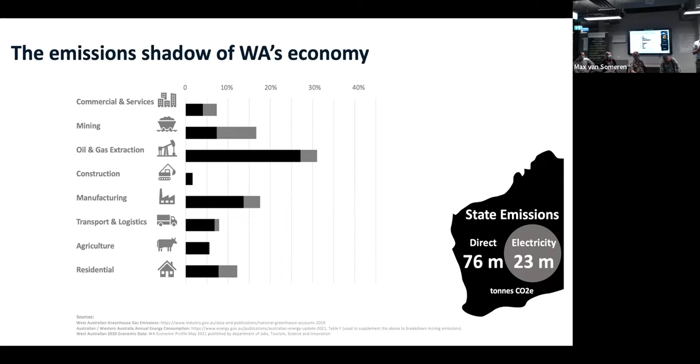So it's a great intro to the previous talk, but an absolutely terrible intro to this talk. I knew that at the time, because I knew we had this coming up. So I downplayed residential then, but I think I can backtrack from that without actually changing the facts. First thing to point out is that WA is actually a bit of an odd case.

The other thing is to think about the kind of decisions we make in relation to housing and buildings. They're very different to other decisions in our lives, because they're large, high cost decisions we make relatively rarely. One example from my own life, which you may have seen because I posted it on LinkedIn last week, was that I installed a home battery.

This cost me $17,000. Adrian was joking earlier that maybe that's why the money box is over there, so I can slowly get that back.

The amount of CO2 it will save is about 2 tons per year, and I'll probably never see the total return on the investment. It works out as about $200 or $250 per ton of CO2 saved. So it's a pretty expensive way to save CO2, actually.

But the reason it was appealing as a decision was because it's the kind of decision I only have to make once. Right now we live in a society where pretty much everything we do creates emissions, and it's completely exhausting to try and think about that all the time - like when you go to the supermarket, thinking about the decisions you make, the other procurement choices of all the little things we buy in our lives.

The bar all the way to the left is heating and cooling. This one says 40%, I've heard it as high as 48%. So if we design our houses so that they are warm in the winter and cool in the summer with minimal additional energy, we can immediately eliminate most of that energy expense. Now if you add energy efficient appliances, LED lighting, you can drop that down a lot further. And if you're using electricity instead of gas for cooking, it gets even better. According to Max, who put up that very cruel graph, it's only about 12% of our energy use, but we can, with better design, pretty much knock that in half right away.

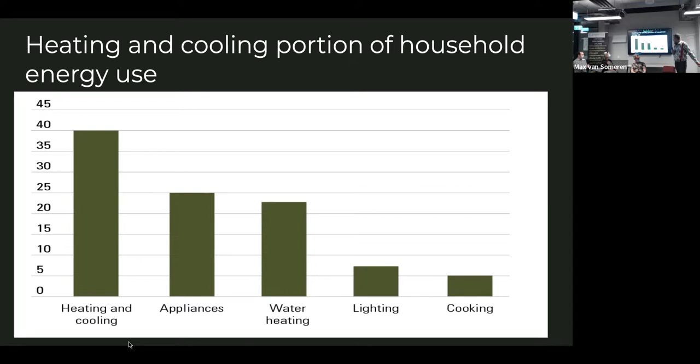You put solar panels on the roof, yeah okay, you don't have any energy bills, but you've got to pay it off and it's a long slow route. But the people who are living in passive solar houses, they just tell me their lives are so good. And this is why I want this to become mainstream.

Now probably a lot of you are not going to build a house this year, but you probably know somebody who does plan on building a house or is part of a housing cooperative or something. What I keep saying to people is: friends don't let friends build badly. So we want to get this idea out into the mainstream—this is a much better way of living. And it's not rocket science, although Matt will tell you differently because he's got a living to make.

So I've spent the last 6 years going to people who are living in passive solar houses and interviewing them—what's it like living in a passive solar house? I want to run through this because Matt's going to tell you the mechanics of it, how it works, but I want to tell you about actually living in a passive solar, energy efficiently designed house.

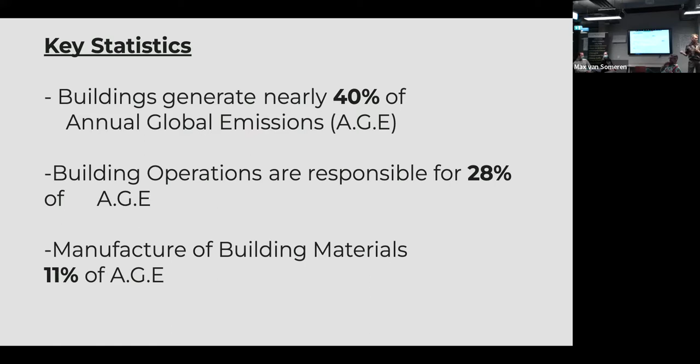So there are two main streams of energy efficient building design. Keith has just outlined the glories of passive solar design. And there's also the passive house, which a lot of you probably have heard of if you've watched Grand Designs. You know, you see the guy with the big fan on the doorway testing to see if the house is airtight. That's passive house, those sort of houses.

So we'll have a look at, I'm just going to run through quickly the 5 main points for each one. And if you can remember those, you're going to walk away from here tonight fairly empowered to know the guts. And yes, it is relatively simple in reality, but you'll know these principles, and it's quite empowering to know that if you ever make a decision in the future to build a new home, you'll be able to go, wow, I know the 5 principles. You can pick one or the other, and away you go.

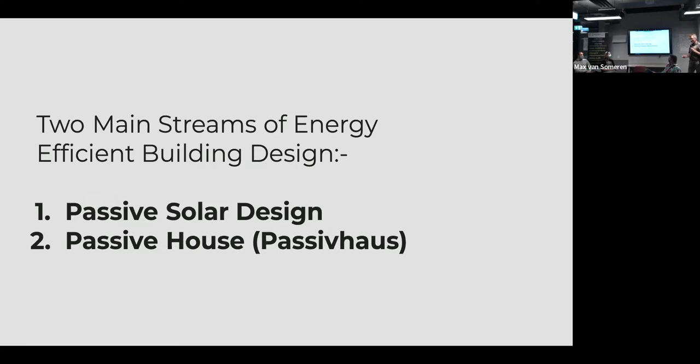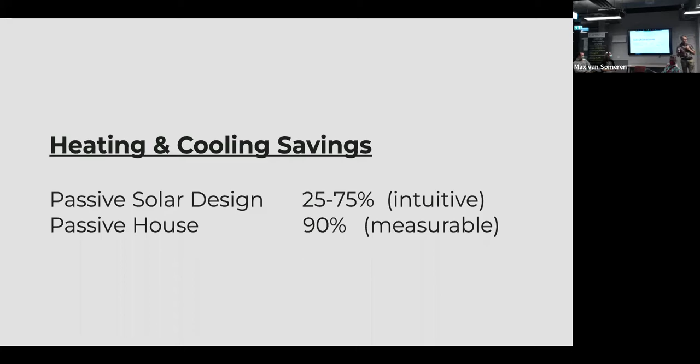So these two streams - passive solar design can save you anywhere from 25 to 75% of your heating and cooling, and passive house is designed to save you 90%. Passive house is measurable. It is a German-based system, engineered. Everything is designed and measured down to the decimal place, which is pretty cool. I don't really love physics, but I did the course and my brain was whirring having to absorb all the physics of it, but it's pretty amazing. Passive solar design is more intuitive, but it has principles that obviously work really well.

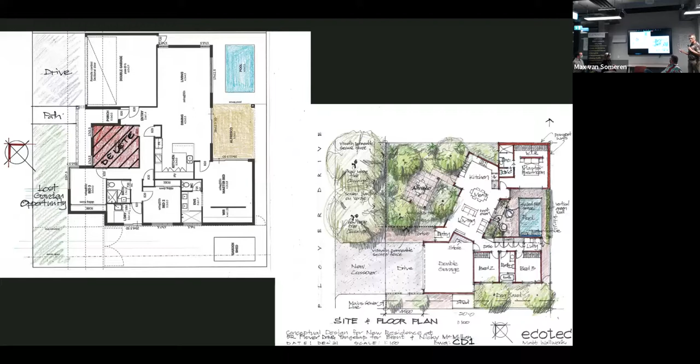And we've got such an amazing climate here that not using our outdoor spaces as rooms of the house is counterintuitive. So they're ecstatic with this. It was just a really good example, and it was a bit tricky because obviously the north is at the wrong angle, it's at the front of the house. But I've suggested having a quite thick hedging at the front to give a private front yard. So there's ways of solving complex problems and making it work.

So getting on to the 5 principles. Orientation was the first. Obviously your outdoor living, if you can get it to the north, is fantastic. Your living areas oriented there, and bedrooms and bathrooms can be to the south. It isn't always possible to do this, but there are things you can do to mitigate it if you can't.

The second important principle is the design of how the sun enters the house. On the left, the sun is high altitude in summer, low in winter. That's a principle most people understand these days, having the eaves designed correctly. Our problem in Perth is more the summer than the winter, keeping the heat out rather than trying to keep buildings warm. But you want to do both, while always leaning towards keeping the heat out of a house in Perth.

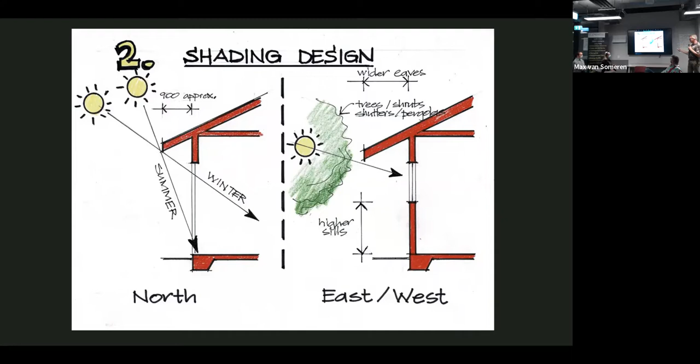And on the right, east-west windows, you've got the sun coming in low. So you've got to deal with that, and there's various techniques you can use to do that. But I really just want to run through quickly so you know what the 5 principles are.

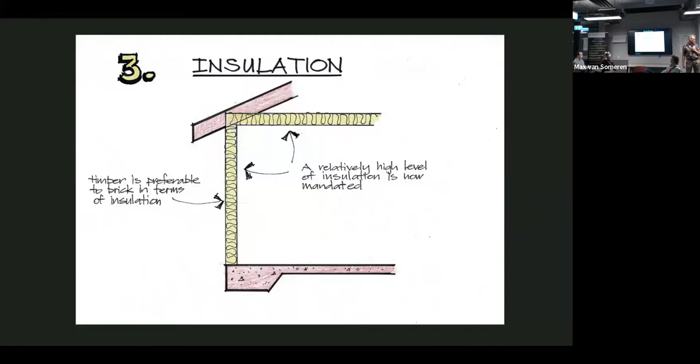So insulation, that's like Keith was saying, wasn't that popular in the 1960s, and now our government even supports insulation. We had that semi-disaster thing of the free insulation a few years ago, but that's obviously important.

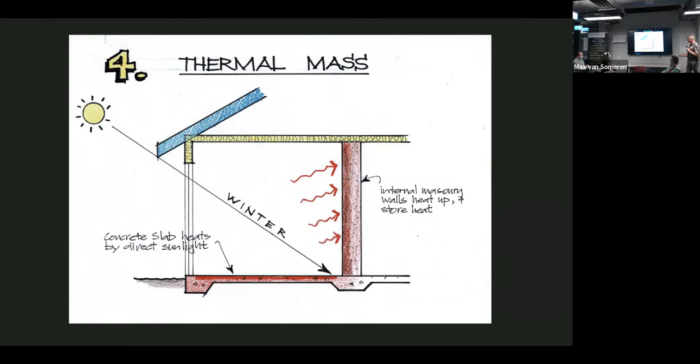Thermal mass is what Keith illustrated with the concrete slab heating up. You can do that with other materials inside the house, concrete walls, rammed earth or heavy brick walls, or reverse brick veneer external walls where the thermal mass is on the inside of the building. And then cross ventilation is another really important principle, where you're using our cooling breezes, obviously in WA, it's the Freo Doctor.

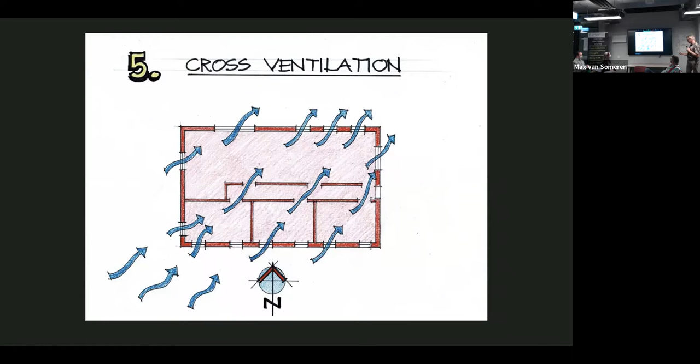And there's ways of positioning windows and doors within rooms and the whole house to make it be able to be flushed out when you take advantage of those breezes.

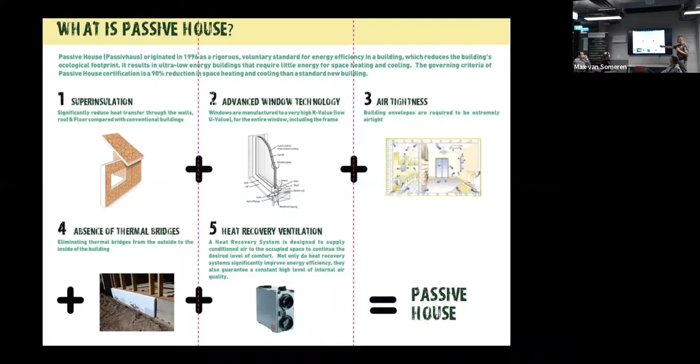So what about passive house? Well, there's the 5 keys there: insulation, advanced windows, air tightness, absence of thermal bridges, and heat recovery ventilation. We'll just take you through those quickly.

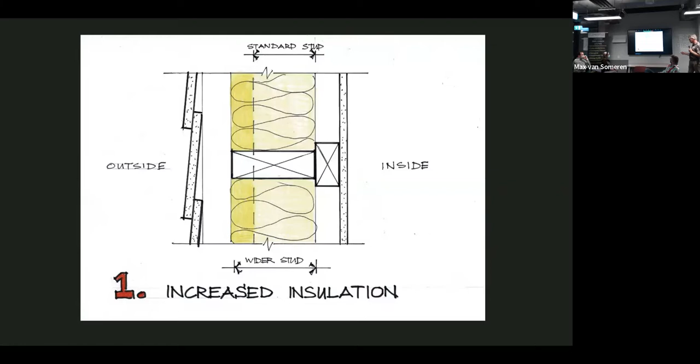With increased insulation, it's amazing in Perth to achieve those really high standards of passive house. You don't actually need much more insulation than a regular house because our climate is relatively mild. So passive house is not overly expensive to achieve in Perth, which actually I was with a guy today going through it, and he's come up with a really good system to make it quite affordable.

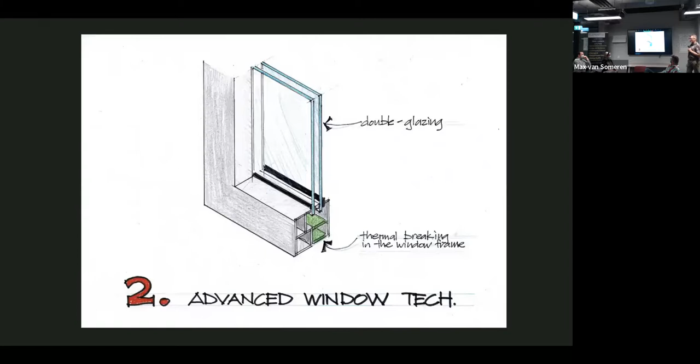Second principle is advanced window technologies. For Perth people, double glazing is advanced. In Europe, they don't use double glazing, it's not advanced enough, so it's all relative. They only use triple glazing, and thermally broken. So if that's an aluminium window, you don't want the heat transferred through the frame, so you'll have plastic gaskets etc. to stop heat transfer through the actual window frame. So that's a bit of a minimum, it's a good idea really. Double glazing is not a bad idea to put in any house, not just passive house.

And it's got a lot more affordable in Perth of recent times. Number 3, air tightness. So what passive house does is it seals up the house very well, so you're not losing and gaining energy through all the little gaps in a house. And that actually does save a lot of energy. And they do this by using...

Intelligent membranes that allow vapor to breathe through them or permeate them, which avoids mold. So it's a healthier house. And these membranes aren't really much more, they're only $1 to $3 per square meter more than builders' membranes that are available in Perth anyway. So he was telling me today, the supplier of these, he was just explaining that you get a far superior building for not much more cost. So to me, that's a terrific investment.

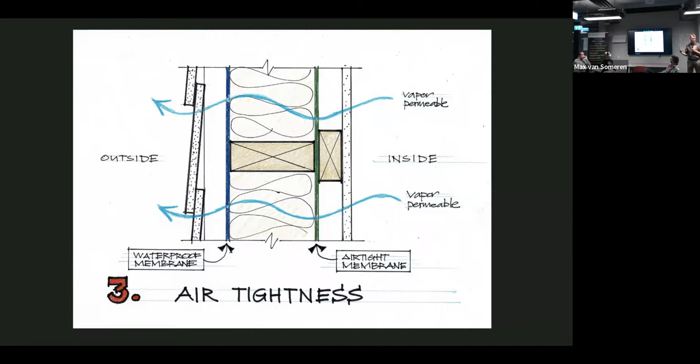Number four, designing out thermal bridges. A lot of our houses have a steel beam going from inside to outside, which is basically a highway for heat to come in and out. What you do is make the structure independent, so that steel doesn't come straight through to the inside of the house. You've got to watch out for stuff like that.

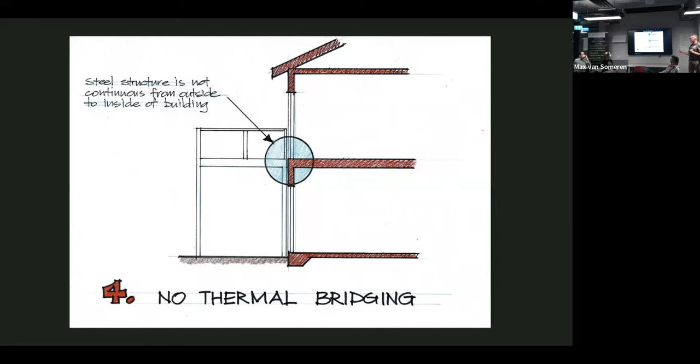In Europe, they will actually insulate the slab, but we don't need to in Perth. We just don't need to achieve that degree of insulation to get to passive house standards.

Lastly, because the house is so well sealed, it has a mechanical ventilation system, which is a bit of a cost, but it means there's a very low energy fan continually keeping pure air in your home. This is wonderful for people with allergies, or with smoke issues. You can put HEPA filters on it if we've got bushfires, to clean up your air.

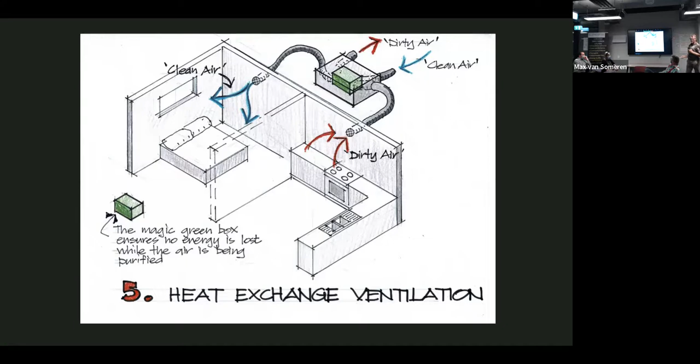They obviously chew up a bit more energy because they're doing more work. But this is a ducted system. It takes the dirty air out from the bathroom and kitchen and supplies clean air into the living areas and bedrooms, exchanging the heat in a little box. It's a pretty smart system.

So that's passive house. There's a few stats there.

It guarantees keeping the house 20 to 25 degrees 90% of the time, with heating and cooling loads that are guaranteed. It guarantees humidity cannot exceed 60% relative humidity, and air tightness is less than 0.6 air changes per hour, measured at a pressure of 50 pascals. Most of our houses would have an air change of 20 to 30, with air coming in and out and a lot of energy lost throughout, like I mentioned earlier. But passive houses guarantee a very low loss and gain of air through the building.

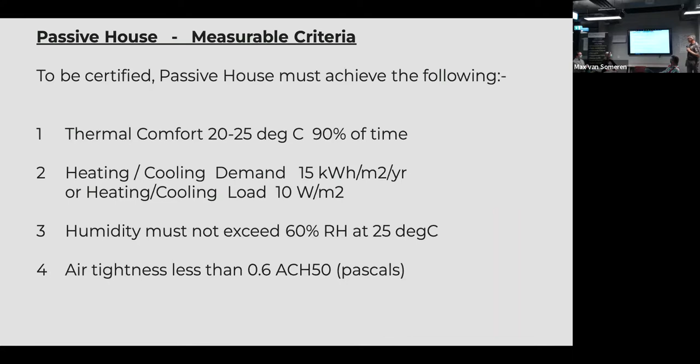So passive house versus passive solar design, who wins? The simple answer to me is, well, how green is enough green? If you did either of these, you're making a huge contribution. I think there's a bit of discussion between believers of both these styles of energy efficient housing, but I prefer to sit very comfortably on the fence and say, hey, if you did either, you're doing a magnificent job.

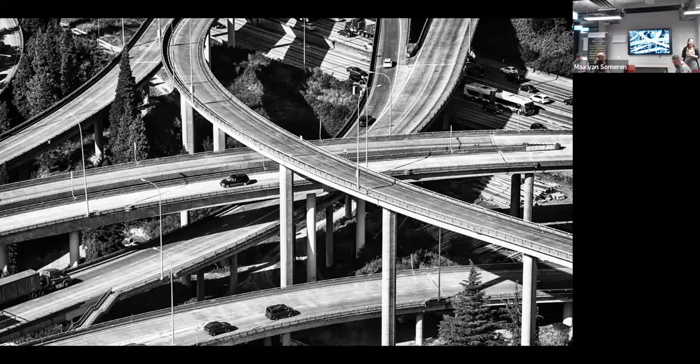Okay, yeah, cool. All right, so I thought I would just start off with what is town planning, because believe it or not, a lot of people don't know. They think that it is this, and it's definitely not. Every time I mention I'm a town planner, they tend to say, oh, what's with all the roundabouts and traffic lights? And I'm like, yeah, that's not what we do.

So just put a little definition up there. It is a technical and political process that is focused on the development and use of land with a primary concern of public welfare. They've had town planning around since the start of civilization, but they say its birth was really in England, in the late 1800s with the garden cities movement, which was all about trying to counteract the slums and the disease that were rampant at that time, trying to get people out into fresh air and open space to make them better.

And yeah, pretty much any type of development probably involves some sort of town planning, and it involves a lot of other different disciplines as well.

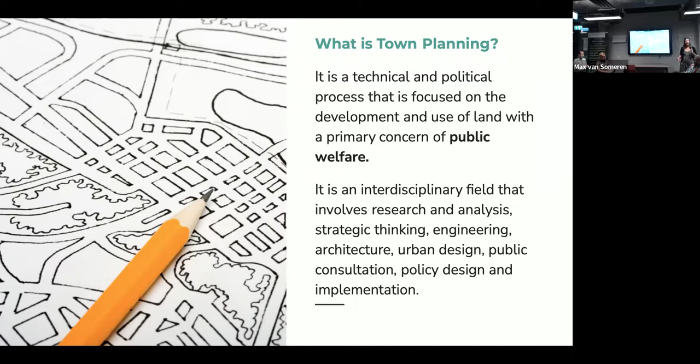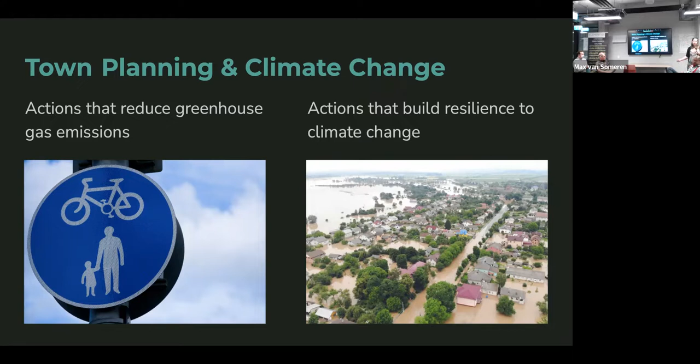So how can town planning impact climate change? Well, I've looked at it in sort of the way of actions that reduce greenhouse gas emissions and also actions that build resilience. So your typical mitigation and adaptation.

The actions that build resilience to climate change - currently we've got a few different policies around bushfire planning, coastal planning, water planning. Obviously it's drying up, so we've got to be careful how much we use. Tree retention, and also renewable energy support. They do actually have a policy about how we can help support more renewable energy projects from a planning point of view.

The compactness of the urban form, what they call transit-oriented development - so development, density and housing that's concentrated around train stations and public transport hubs. It makes it easier to use public transport rather than jumping in your car. And also end of trip facilities help with people using cycling too.

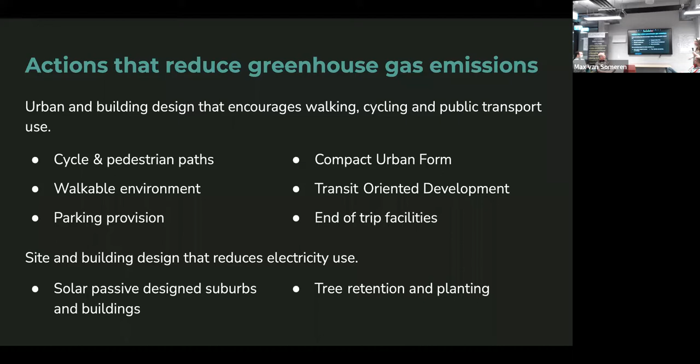And then what Matt and Keith have touched on is the site and building design that reduces electricity use - so your solar passive design, and that can be suburbs as well as houses, and tree retention and planting. There's probably some others that I've forgotten, but I think these are the main ones.

So as far as suburb design, we've actually got some regulations about how new subdivisions should be laid out to optimise people being able to build solar passive design houses. So what Matt mentioned before about orientation - just making sure that the lots are either lined up to true north or just a few degrees off it to make sure that you can build something that maximises that winter sun.

And also, when you get down into the building details too, there are actually rules and regulations about how you build to make sure that you have your cross ventilation and your solar penetration, which Matt talked about.

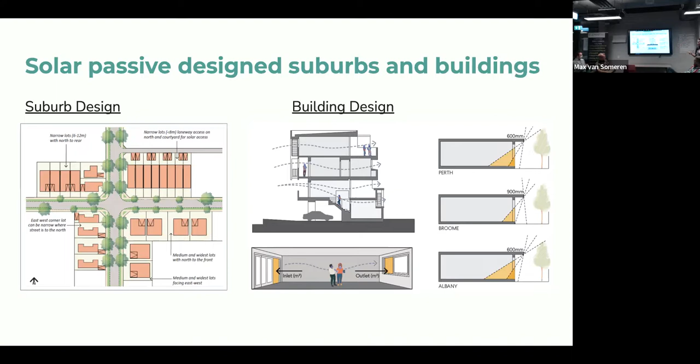And now I'm going to switch my hat, as Keith said, and I'm going to talk about co-housing because it's something else that I came across a few years ago. As a town planner interested in how our built form can impact on how we live, and to live more sustainably, I really got interested in this topic and delved into it. I now actually work part-time for a not-for-profit organisation called Cooperation Housing, and we specialise in cooperative housing, which generally is around this co-housing model.

And why is co-housing great for climate change? Well, from my perspective, it's the sharing of resources and responsibilities. When you get together and all contribute to looking after the chickens or doing productive gardens, or you can even as part of the community have an electric car share or something like that. It's basically when you get together and you collaborate, the sum is more than a single part.

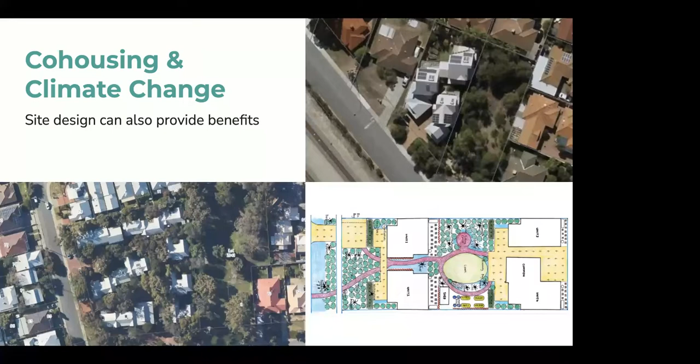Another couple of examples here. This one's over in Hamilton Hill, where we've got car parking at the front. Whilst this is an old driveway, it's just going to be a pedestrian leg now, going through a massive open space area. I don't have an aerial of this one, but there's a big jacaranda tree in the middle, and that's actually 4 dwellings on that site - 2 little micro apartments, a little micro dwelling, and then the original house.

So from a climate change perspective, keeping vegetation obviously helps to cool the environment and therefore use a lot less energy. And you're also not putting a lot of waste to landfill, because you're utilising the existing buildings. There's a lot of benefits for the environment, not just from a climate change perspective.

The one I've got over the top is actually one we're working on at the moment in the Witchcliffe Eco Village - I don't know if anyone's heard about that. We're actually designing that in collaboration with the future residents. They've worked with an architect to design the whole site and how the dwellings would be laid out. So it's basically a co-developer model rather than building your own single house - they're building this whole development as a group. The main benefit of that is they get their houses at cost.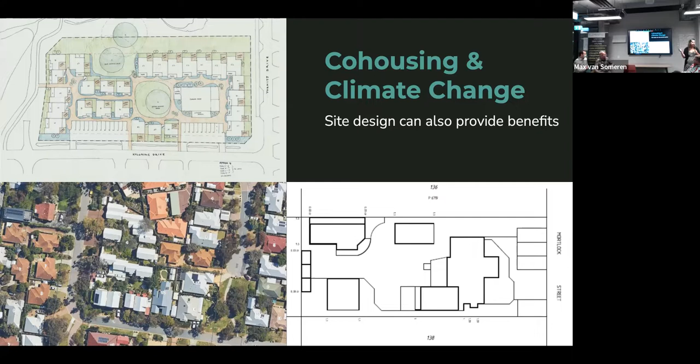And that's it for me.

I'm going to keep quite tight on time if that's okay. Sure, we might skip the video if I can.

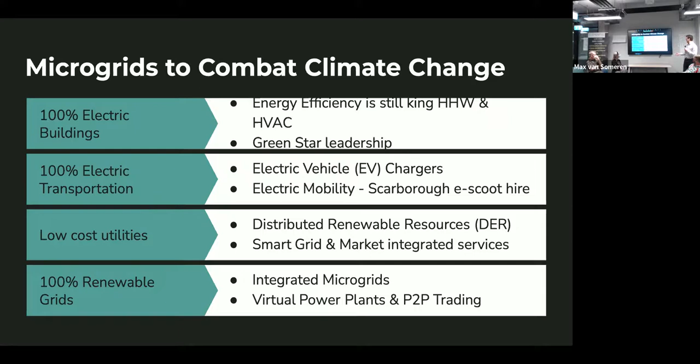A little bit about Green Star and this 100% electrification. So here's where we're at now, and we're steadily getting rid of gas by 2023. Any 5-star building, Green Star - which now has a residential product for land developments - by 2023 for 5 stars and 2026 for best practice. You can still see there's a long way out to 2030 to get to legal compliance through the National Construction Code of Australia, but we do have elements creeping in.

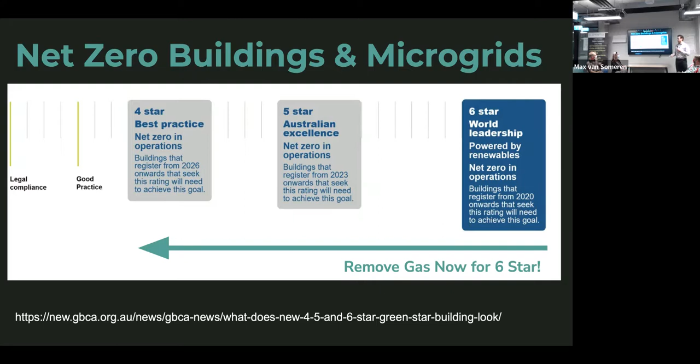So the latest NCC requires you to have 9 square meters, I think, of north facing roof, which is one of these town planning type requirements.

Just a quick case study - here's a building we did 3 years ago, put 20 kilowatts of solar, 30 kilowatt hours of battery storage. We've got electricity meters in there, connected to our PowerLedger peer-to-peer trading platform. That knocks off 30% of the cost versus Synergy A1 for all the residents and the commercial unit. I'm delivering the building, so I get cheaper energy at no upfront cost to the developer.

Developers are trying to do the right thing, but they are in it for a profit, so these types of new business models help reduce cost. And this was 3 years ago, so it's been operating pretty flawlessly, and haven't really had any issues with the batteries.

So it's operating pretty good. This is officially the most sustainable apartment building outside of New South Wales - it's the only 6-star NABERS rated apartment building for energy. It's also timber constructed, the first mid-rise timber constructed apartment building. Lots of other cool features, but don't have time to go through that.

I was going to run through the video for Witchcliffe, but I think we're going to run out of time, so we can share that link out, or you can jump on our website at Witchcliffe Eco Village's website and check it out - there's a 45-minute video. I extracted the energy section because it's long if you get trapped on it.

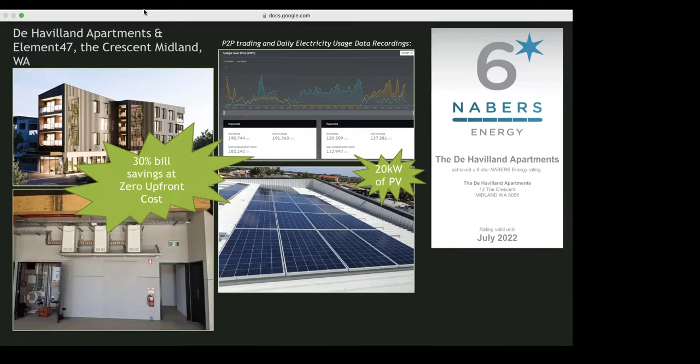And then from Melinda, we heard about actions that reduce greenhouse gases. I only caught the ones which I thought were relevant to people in here rather than what a town planner might do, but you could extend it: neighbors collaboratively managing the community, sharing resources, and site design.

And then from Andrew, what I heard was 100% electric buildings, 100% electric transportation, low cost utilities. Can I get rid of this?

Gee, I'm sweating in there. 100% renewable grids integrated, well, the sub details - and that last slide was about 4, 5 and 6 star ratings increasing across time. Does that kind of capture the main messages that you guys spoke about?

Cool. All right, so what I'm going to invite you to do is think about some questions to explore when doing this activity. What's important about what we heard? What does it mean to me, my family, my community, my organization? Remember when we drew the places we want to have impact - is it you individually, it might be in your community, it might be in your organization.

If there's nothing here that you feel individually, then maybe wear the hat of NZN, the Net Zero Network - their mission is to reduce, to get to net zero. So if you can't think of anything individually, try on the voice of NZN. What does it mean to NZN? What should NZN do? What's your highest dream? What's your worst fears?